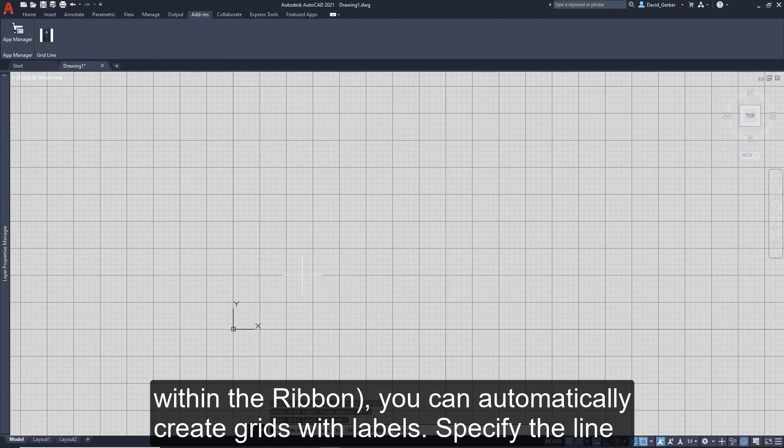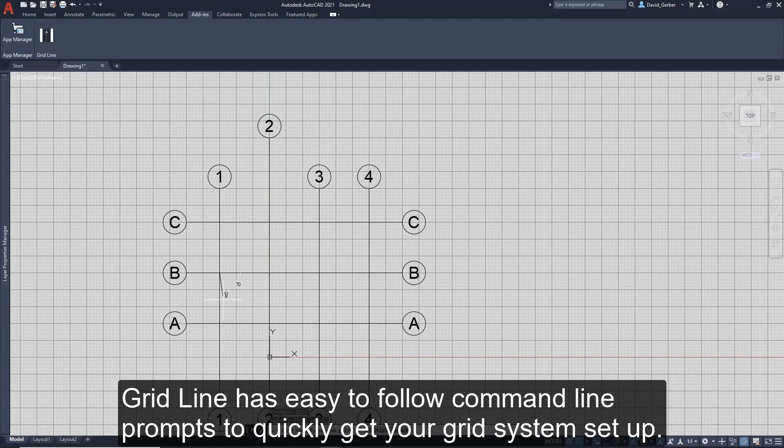The first one we'll have a look at is the Grid Line app. Found in the Add-ins tab within the ribbon, it lets you automatically create grids with labels. Specify the line extension length, label indicator, label frame dimensions, and label height. Choose between alphabetical or numeric labels, and whether you want them at the start, end, or both. Grid Line has easy to follow command line prompts to quickly set up your grid system. Make note of where you place your points when snapping to a grid, as this dictates how the grids are placed.

These are created as separate entities, so if you need to adjust for whatever reason, it's easy to do so. With the MOffset add-in, we can offset an object instantly with different distances in a single click,

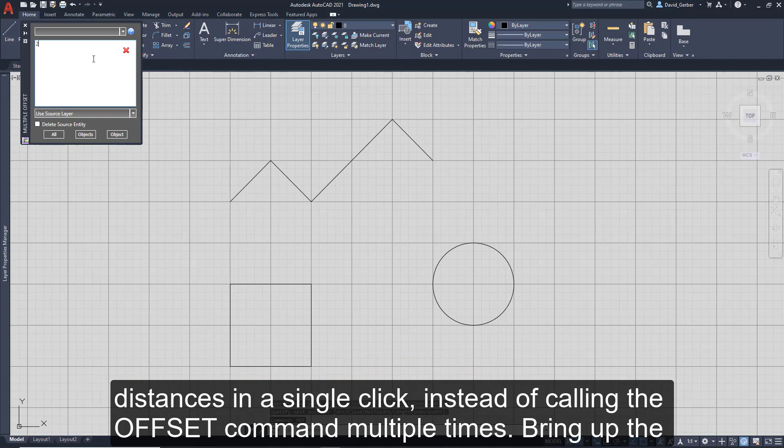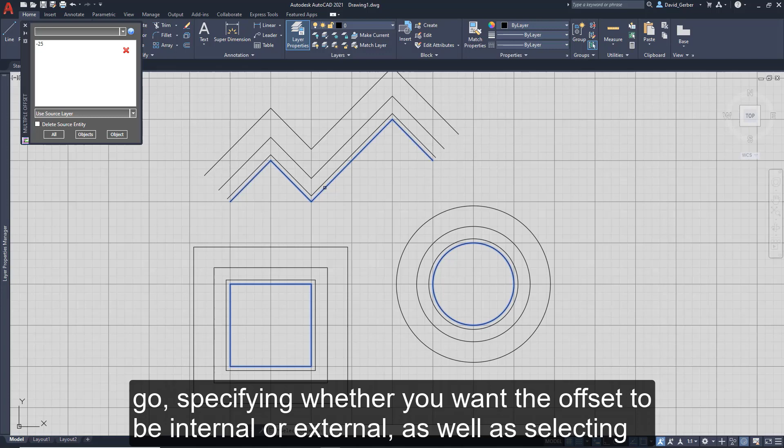instead of calling the offset command multiple times. Bring up the command with the shortcut MOF, or from within the Add-ins tab within the ribbon. You'll no longer need to launch the offset command multiple times. Instead, you can easily enter the multiple distances before selecting 2D objects. Choose which layer you want it to go on from the get-go, specify whether you want the offset to be internal or external, as well as selecting between one object or multiple objects.

With the LevelSet add-in, we can quickly create elevation annotations. Specify the base point for AutoCAD to start calculating from, and let it measure the vertical distances from the original point. Easily calculate the measured value through a level marker.

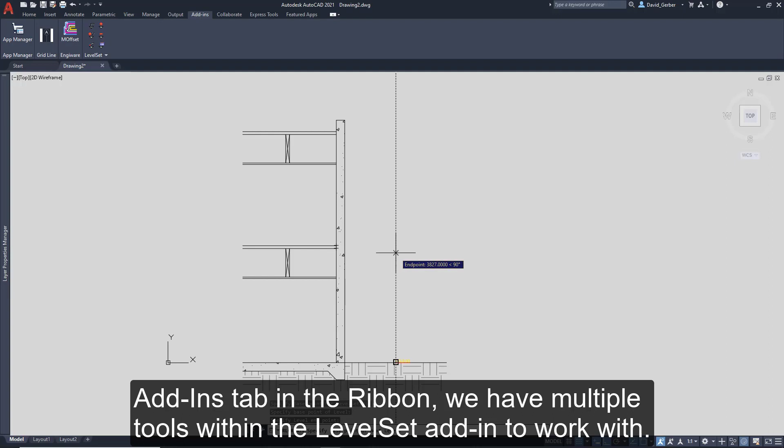Found within the Add-ins tab in the ribbon, we have multiple tools within the LevelSet add-in to work with. Specify how you want the lines, symbols, leaders, text, and units to look within your annotations. Specify the base point and follow the command prompts.

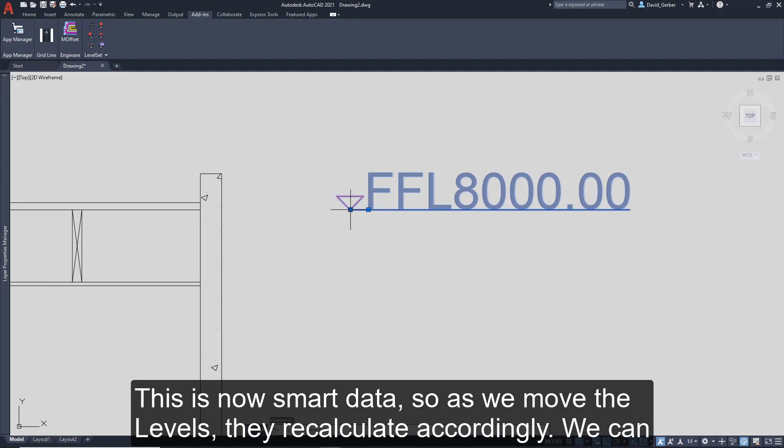Quickly adjust the properties of the levels if they do not suit, as well as add in custom blocks if necessary. This is now smart data, so as we move the levels, they recalculate accordingly. We can also move the leader lines to suit if we need to.